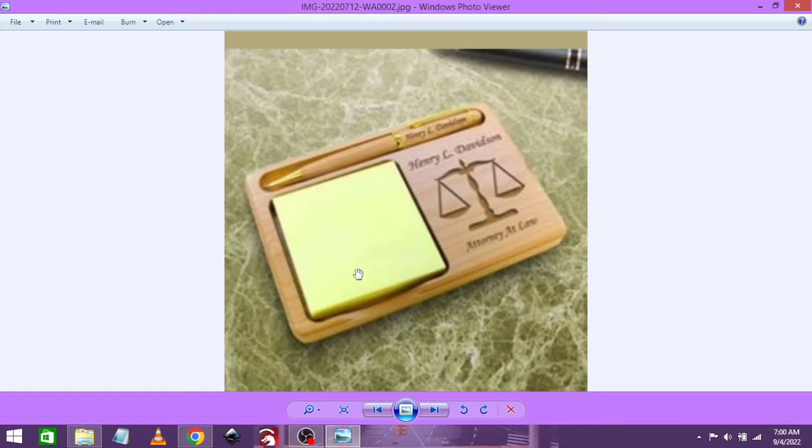Today we are going to be using Easel to design a pen holder, a holder for your pen as well as for your sticky notes. I got this request from a client, and all she sent me was a picture. She wanted this, as well as engraving on the pen with the sticky notes. So I said yes, I will be doing it.

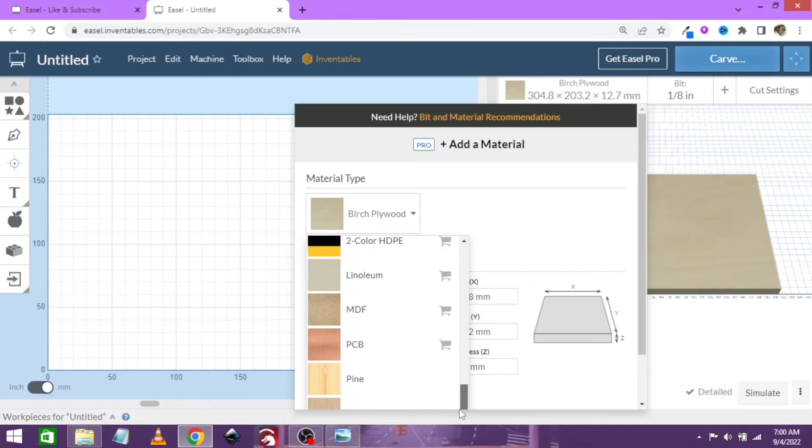So let's go. Project, new project. Let's wait for it to open. Okay, it's open. First thing you want to do is select your material, your stock size, and what type of material you are using. Let's scroll down and just say it's soft maple. So we have a piece of soft maple, 200 by 300 millimeters.

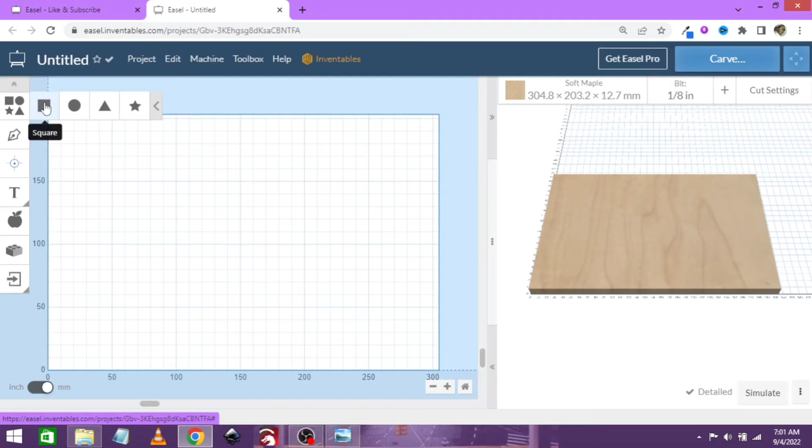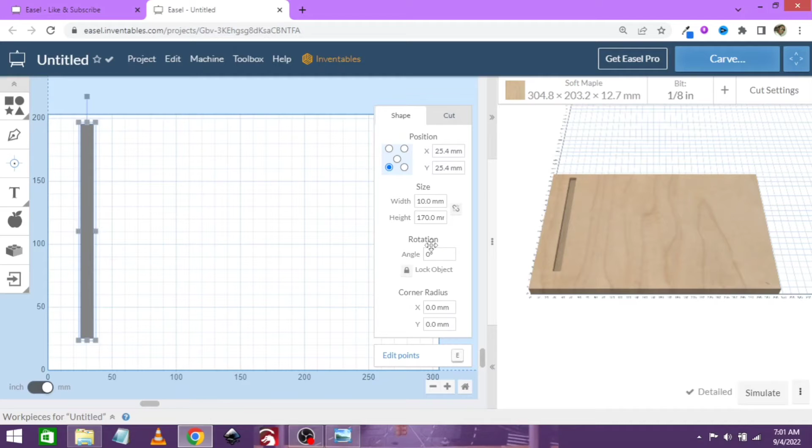The first thing we're going to do is make the cutout for the pen. We are going to use a square shape. The width of the pens is normally 10 millimeters, so we put in 10 there, and the height is normally 170 millimeters. With this, we are just going to rotate it 90 degrees.

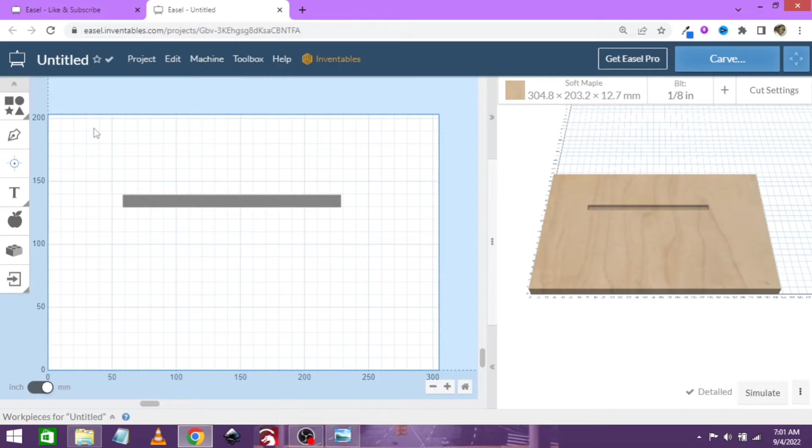Now when you lay the pen in this, it is going to be sitting almost halfway into the groove, but you will still have trouble picking it up. So what we're going to do is make a circle, also 5 millimeters deep, and it will be 20 by 20 millimeters.

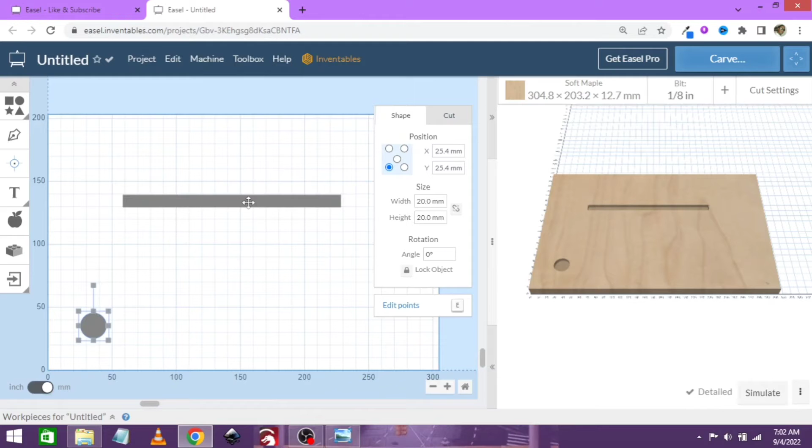So let's select the circle and select the pen, holding down shift to select both, center it on both the vertical and horizontal axis. Then we go to edit, click combine, and there you have it, we have one shape now.

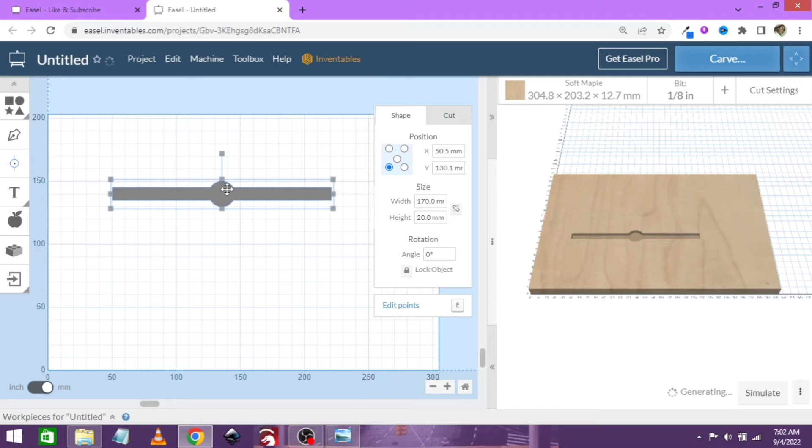Then the second one is the sticky notes. That's a square. The sticky notes are normally 75 by 75 millimeters, but I want a 5 millimeter cushion on all four sides, so I'm making it 85 by 85 millimeters.

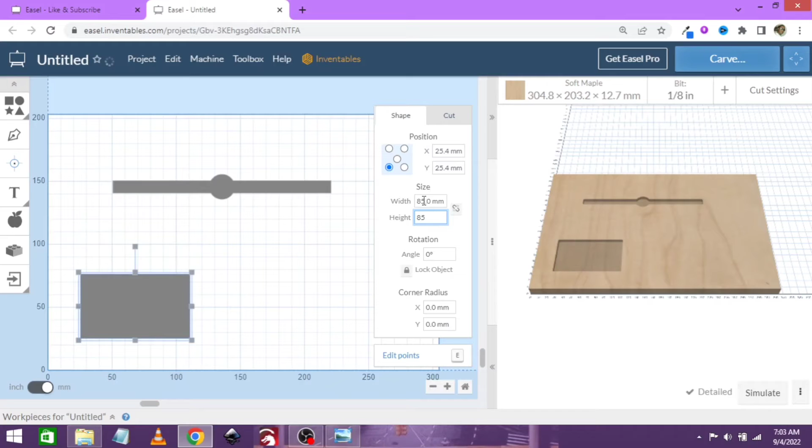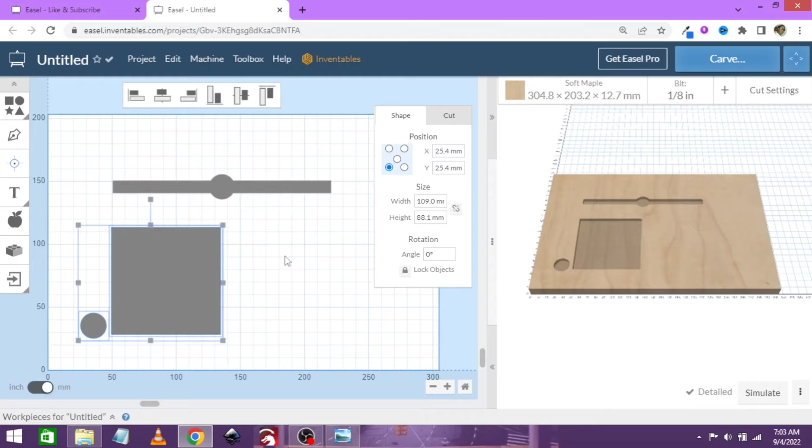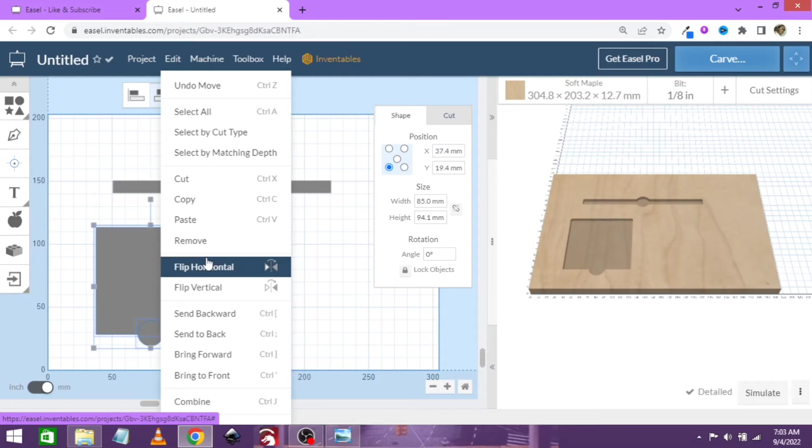Also, it's going to be difficult to get the sticky notes out, so let's make another circle, 20 by 20 again. Select both using shift and select, center it, then move this one just a bit down so you are able to get your finger in. Then shift and select, edit, and combine the shapes.

Let's move this. Now let's align these two on the left hand side. Now I want this and this to be about 10 millimeters apart. So if we zoom in...

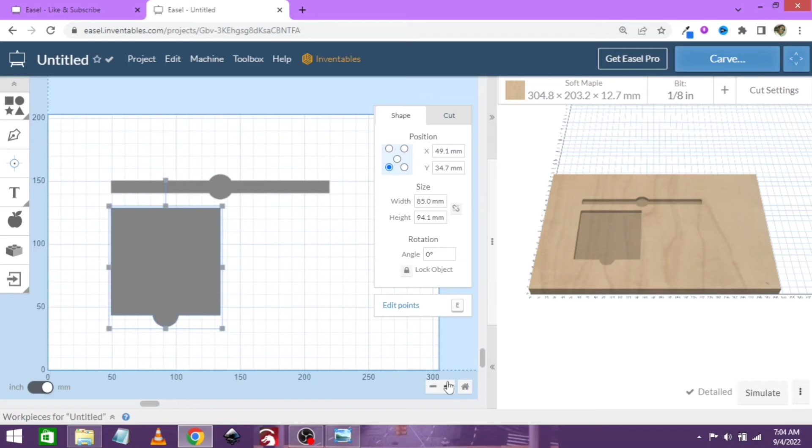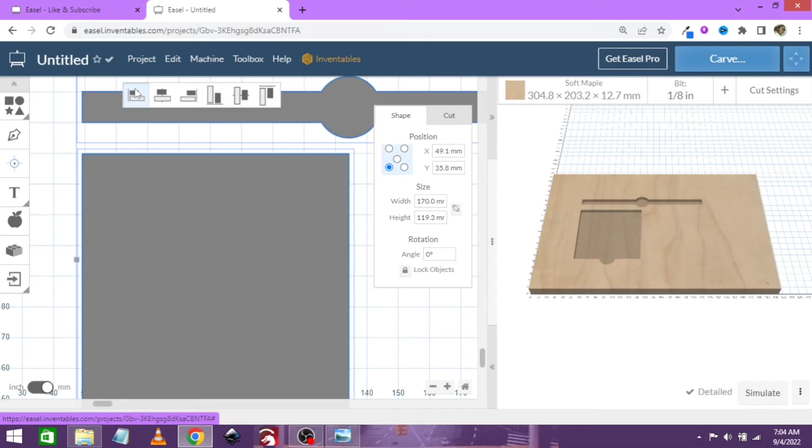Why am I having trouble? If we zoom in, you will see this block is 10 millimeters. So let's just move it, move this down, just touches the 10 millimeters. And let's move this up, just touches 10 millimeters, but let's just realign this. There you go. And then we can zoom out again.

As you can see, as we are working, it's updating here on the right hand side.

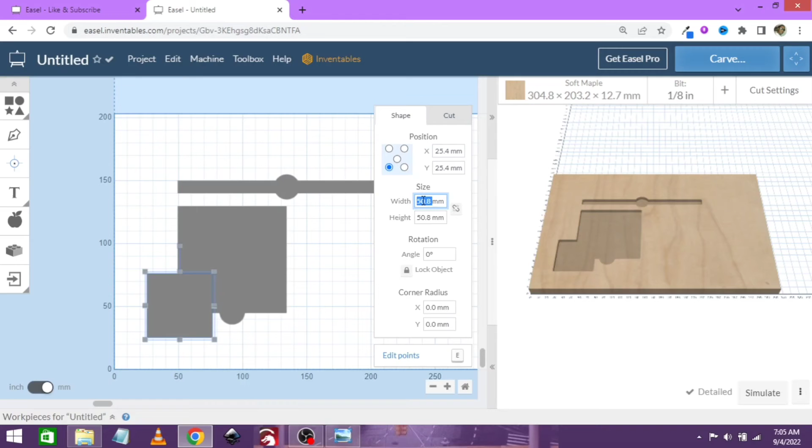So now we need a bigger rectangle around it, but it needs to be bigger than the pen. I want it to hang over 10 millimeters on each side. So if we take the length of the pen and add 20, we get 190. And if we take the height of both the pen and the cutout for the sticky notes, it will be 125. So let's put in a width of 190 and length of 125.

Press enter. Now as you see, it is still to clear out the pocket. Now what we want is for it to cut outside of the path, and we want to make it straight through.

So we select the pen, or we select the outside shape, then the pen, and center it. I usually get this wrong, so excuse me. Let's just realign these. Let's combine them to make them one.

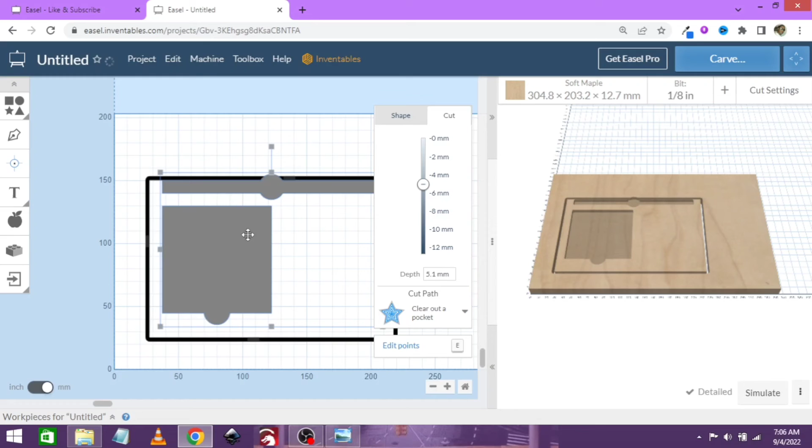Select the inside parts with the outside parts, center them on the horizontal, then on the vertical. Now this is how it's going to be looking.

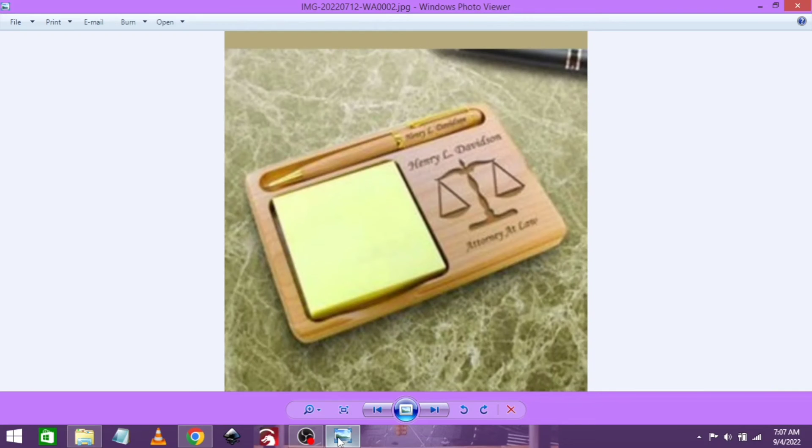Now what you can do is go in here and do the engraving, but I'm going to save that for another video because I will be using my laser engraver to do that.

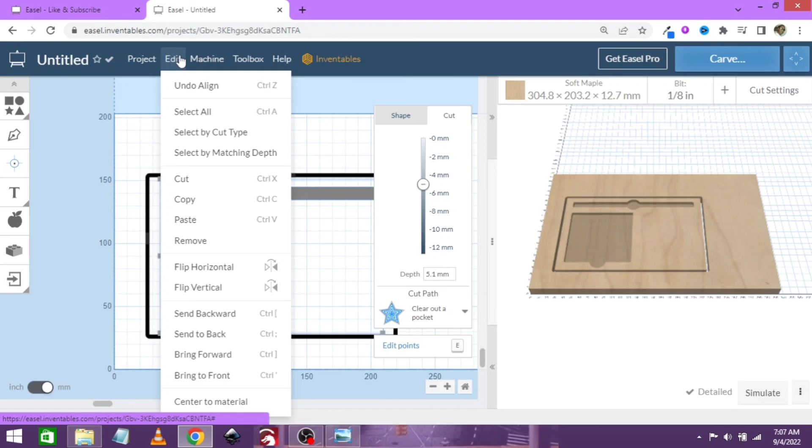So let's just make both of these 5 millimeters deep. Yes, and that's it, ladies and gentlemen.